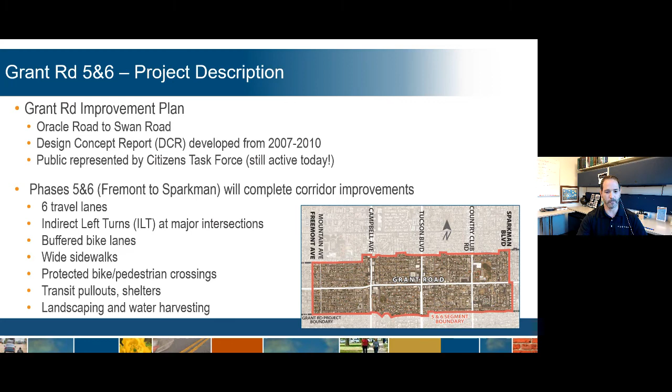So this specific segment will be the last one; phases 1 and 2 are already built. Phases 3 and 4 are at 100% design and should go to construction in the next year or so. Phases 5 and 6 just started design in 2020. We have been working to review what was prepared 12 years ago and are working on 30% plans.

We are almost there, but before we get there, we wanted to get your input and everybody's input. And in fact, as we've been to the in-person open houses over the last couple of weeks, we've already made a couple of tweaks to what we were proposing to make sure we fit the context and what the corridor needs. So feedback is always appreciated.

So 30% plans will come this summer, and from there we'll continue in the design. Later in the design, we'll have things like more detailed landscape plans. We will do a noise study to see where and under what circumstances noise walls are warranted. So stay tuned. We will be back to the public when we get there.

Design completion right now, we expect it will be in 2023, I would say probably towards the second half of that year. Beyond that, we still don't know the exact schedule because funding for construction and acquisition of property hasn't been designated yet. So again, maybe the next time we meet, we will have more information about those stages.

So our current focus as we start this project is to look at what was done in the design concept report, that's DCR, and see if that's still appropriate for the corridor. In the last 10 to 12 years in Tucson, a lot has changed, so we want to evaluate that. For example, since then, the city has developed a bike boulevard master plan, and that's informed a lot of where we need those bicycle crossings of Grant Road.

The city has also passed the complete streets policy, and it's working on complete streets guidelines. So one of the changes we're looking at is to better align the bike and pedestrian crossings with those facilities. We're planning to provide 11 protected crossings where people can push a button to cross, whether that's a traditional intersection or a HAWK signal or one of those types of protected crossings.

The other thing we've looked at is whether we need indirect left turns at Country Club. I have a slide later where we explain the details of that, but we're not sure that those are appropriate at this point. And the other thing we looked at is the land acquisition that was projected for this project was very significant, so we're seeing if all of those are necessary.

Obviously part of that is we have budget constraints, but it's also really important for us to reduce impacts to homes and businesses. Creating a corridor without businesses and without residents is not a vibrant corridor. So you see here, we want to reduce impacts. We want to support economic vitality along Grant Road.

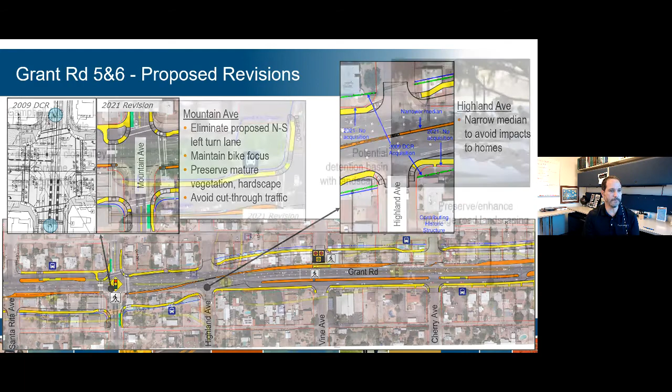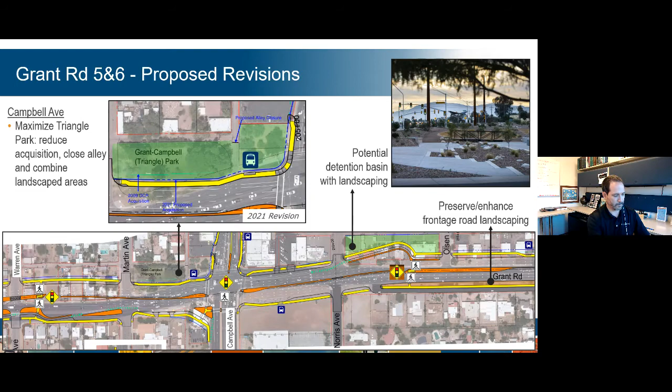Hey, Alejandro, you're cutting out just a bit. Maybe let's try and turn your video off, and we can just go full screen with your presentation. Okay. Do you need me to go back?

Maybe a little bit. Okay. Did the discussion about Triangle Park come out okay? No, let's start from there.

Okay. So on the west side of the intersection, there's a park that people refer to as Triangle Park or Grant-Campbell Park. We are reducing the amount of property from the park that would be needed. The original design would have taken to this green line that I'm pointing to. The new design would go to the blue line. And again, that doesn't look like a big difference, but it's about 8 to 10 feet less of park space that would be lost.

And then we're also looking at closing the alley over here. And by closing the alley, we are able to consolidate Triangle Park with the other green space at the corner of the intersection. And so that creates an overall bigger landscaped area and open space at the intersection.

The other area I wanted to highlight here is Norris Avenue. At Norris, there's significant drainage that crosses Grant Road from south to north. For the project, we are going to have to purchase the properties on the north side of Grant Road here between Norris and Olsen. So what we're proposing is that since we have to do that anyway, we will create a small detention basin here.

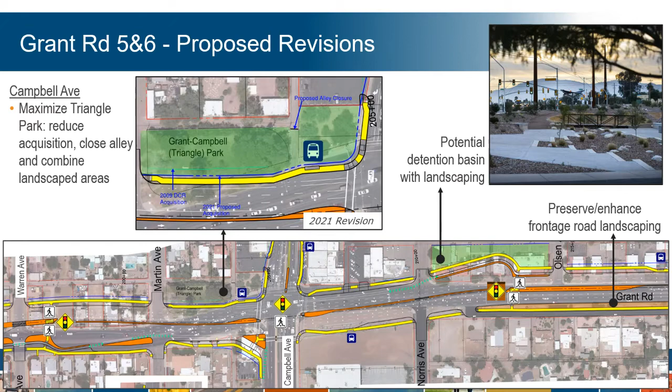We're not changing what the DCR was doing. We're not getting the roadway any closer to the homes. It actually, if anything, is moving a couple of feet away. What we will do is we will add landscaping and new curbing and new sidewalk in that area, the frontage road, better buffering the homes.

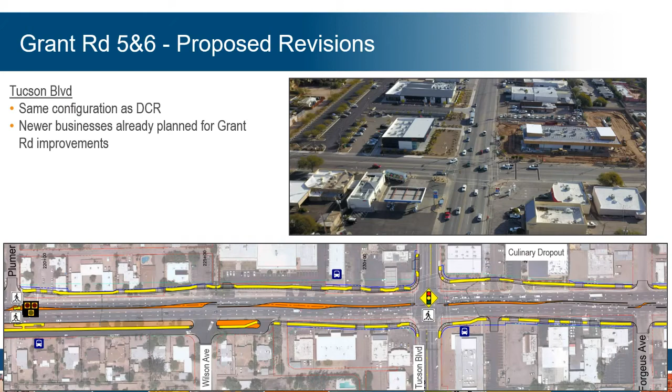Alejandro, you're cutting out a little bit more. Oh boy. I don't know what to do because I'm in the office and that's supposed to have a great connection. There you go. As you got closer, you sounded better. Yeah, I think you need to move closer to the microphone, Alejandro. Okay, I will. Thank you. Thank you. Okay, and please tell me, because I'd rather make sure everybody can hear it. So

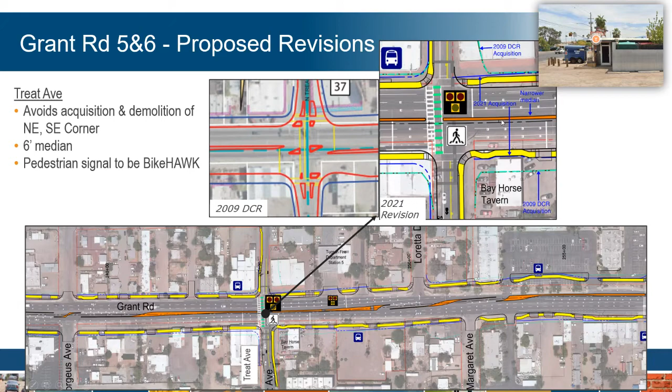You look at Country Club, and it's not really the same type of road. It carries less traffic, and part of it is because it's more of a connector or collector, whatever you want to call it. It only goes down to the Country Club, not intended as traffic. Then we look at what's happening with traffic volume at that particular intersection.

Alejandro? Yes? Just get a little closer, please. I'm as close as I can. I know, I'm sorry, it's cutting out a little bit.

Okay, no problem. So Country Club is not a major regional roadway like the other roads. And secondly, we looked at volumes in the area. And even though the traffic volume on Grant Road overall has been growing, the traffic volumes at the Country Club intersection haven't grown. In 2006, the intersection carried 58,000 cars every day. In 2019, it carried 52,000.

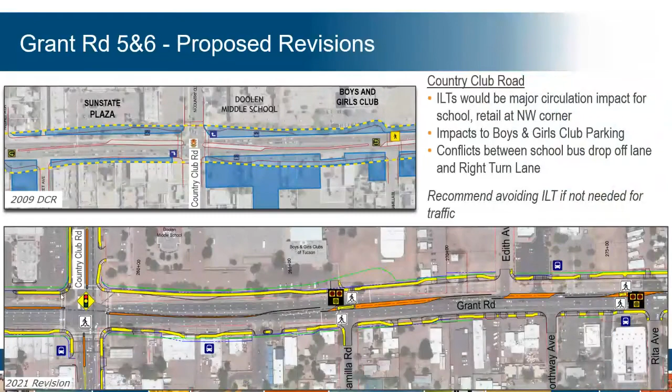without the indirect. So based on that, we are recommending that the intersection remain a traditional intersection, like we're showing at the bottom.

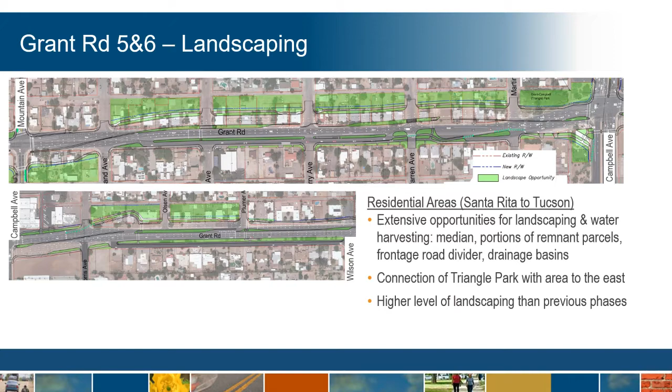On the flip side, as we get to the business areas, I mentioned that the alignment sort of splits both sides, and if we just go full width on all the features, we would end up basically buying out the bulk of the businesses, I think hurting Grant Road significantly. So we try to avoid reducing the pedestrian and bike features, so the sidewalks are still the same with bike lanes, but we did narrow the median. What that means is that we have more limited opportunities for landscaping unless we take the trade-off of acquiring a lot of business.

I would also note that at the open houses we did in person the last couple of weeks, and also when we did phase 2, we did hear from several business owners who told us they don't want very dense landscaping in front of their businesses for visibility purposes. They do like small shrubs. They like hardscape elements and things like that. And lastly, as some of these areas redevelop, the new businesses will have to meet City of Tucson landscaping requirements, so there will be additional landscaping coming later.

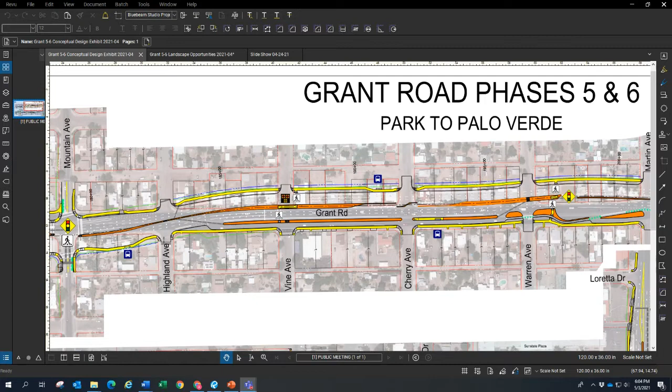Bob or Robin, anything you want to add? Well, I think one of the suggestions that we had on the comment cards was to put some traffic calming devices at the opening of the streets, and so maybe we need to consider that to discourage the cut-through traffic. Right. I will say that the type of median we are showing would prevent lefts out from people cutting through. So when you come out of the local street, you'd have to make a right turn. So again, I don't think we can give it a definitive answer, but we have certainly noted the comment and we'll look into it.

The next question was, will Norris be accessible from Grant Road? The answer is yes. You will be able to make right turns from Grant onto Norris and from Norris onto Grant. Left turns out of Norris will not be feasible. So, like with most indirect lefts, you would go to your next opportunity. So if you're coming from the south, you'd make a right and then make the U-turn at the intersection.

The next question asks to please repeat the discussion on Treat Avenue. I'm not sure exactly which portion, and it's fairly lengthy, so I will cover the main items, and the rest, again, will be posted online. At Treat Avenue, we are going to provide what's called a bike HAWK signal to allow bikes and pedestrians to use the bicycle boulevard. But we reconfigured it from a signal that had a bigger footprint to avoid impacts.

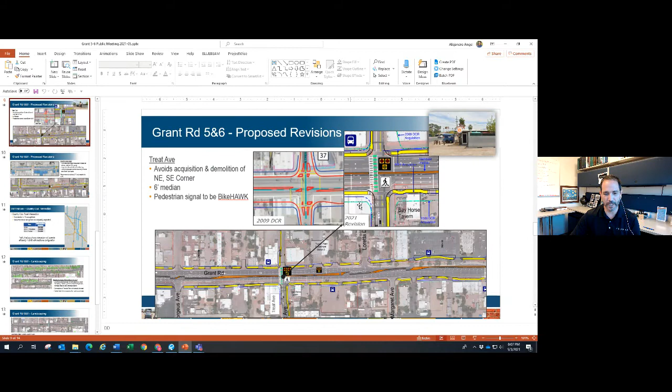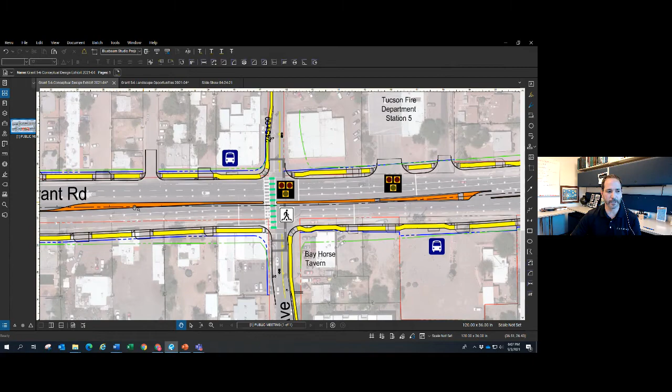Next question I see is, what are the yellow lines? And I'm assuming that's regarding the yellow lines that I'm showing here, which were the same that we had on the presentation. Those are the sidewalks. So, again, the orange is the medians, the yellow lines are the sidewalks. So that shows where the sidewalk would go for the corridor. Hope that helps.

The next question, if the traffic projections were off by 20,000 vehicles for Country Club, how can we be sure your projections for Grant Road won't be that far off? Well, we don't know for sure, but we have done our due diligence to make sure that we are accounting for things appropriately. We've looked not just at how traffic is growing regionally, but what is available in that area around Country Club. I mean, the land uses are pretty much developed.

It's impossible to predict exactly what's going to happen because you have things like autonomous vehicles. You have the shift to online shopping, but at the same time, you have hundreds of Amazon vans running through town every day. So things are different, but we did a sensitivity analysis. So we ran what we think would be the growth rate, and then we ran a higher growth scenario to see if it would still operate appropriately, and it would with the traditional intersection. So we are confident that it would operate well.

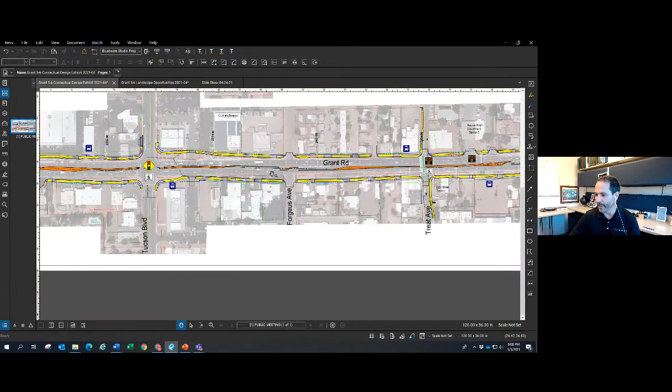The next question is about, has consideration been given to using the southwest corner of Treat and Grant as a detention basin? We have had a couple of discussions about that. What I can say about that corner, which is this building right here, I think today is a dispensary. We know that we need to acquire a portion of the building.

Even though we're reducing the footprint of Grant Road, the blue line is what we need for the project, and I just highlighted it yellow. That still cuts through the building, so we will offer to purchase the building from the owner. Any property, the owner has an option to sell to us, we would have to pay them for the building, and they have an option to retain a portion of their property that we don't need if they want to. Normally that's not economically feasible, but it's their choice.

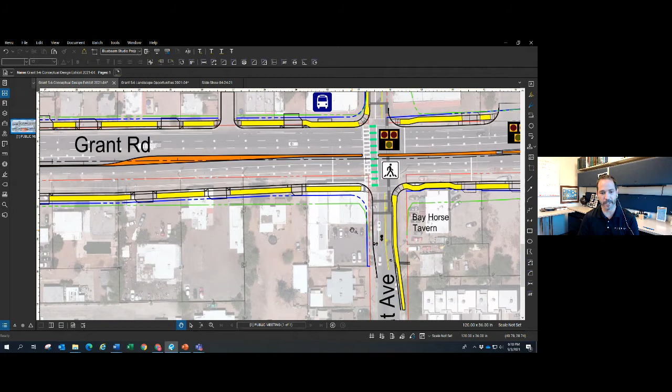If they decide not to keep the portion of the property that we don't need, then we can either look at it as a detention basin or as a parking area or park or remnant to resale, any of those other uses. Treat does carry a lot of drainage, and that's something we would consider as well. I know that corner is a hot topic for city council and a lot of people, given the amount of traffic that's brought to the area. Is there anything else that anybody wants to add, Bob or Robin?

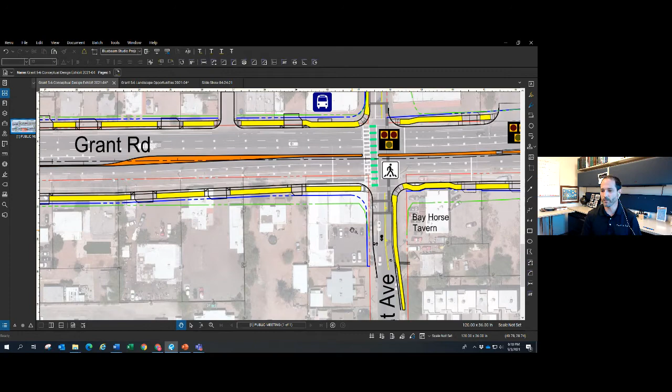No, I think it's too early to really give any information for that particular parcel. Yeah, I guess the best we can say is there's no way we can completely avoid that property with the project. So we are planning on an acquisition. I guess the only thing I would add is as we move forward in design, we'll take what opportunities we can where we have additional property. Mm-hmm. Yep.

Okay. Thank you, Robin. The next question is, more space should be set aside in the business area section of Grant phases 5 and 6 to make room for green space and water harvesting landscaping. Our neighborhood is adjacent to this area, and the disparity between the design section is not equitable for the neighborhoods along this area. So that's a great comment. It's not a question, it's a comment. I will say that we are trying to do everything to make it as nice as possible in that area. We do have a constraint.

Which is more tolerable? Is it to reduce the landscaping and compensate in other ways, or is it acquiring businesses and properties adjacent to the whole corridor? So at this point, we're proposing that we look at other ways to mitigate the loss of some of the landscaping. And again, I wouldn't say that there is no landscaping in this section, but there would be less. These are some of the things we can do.

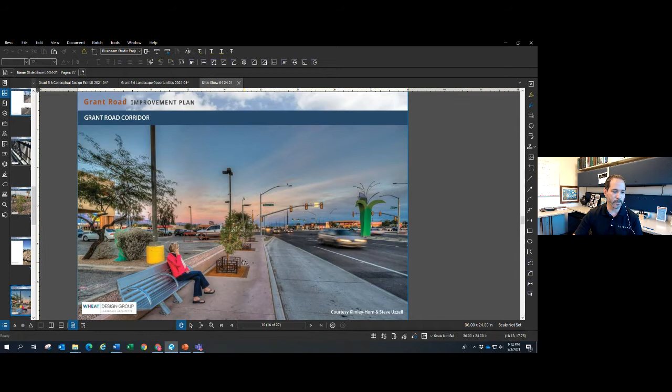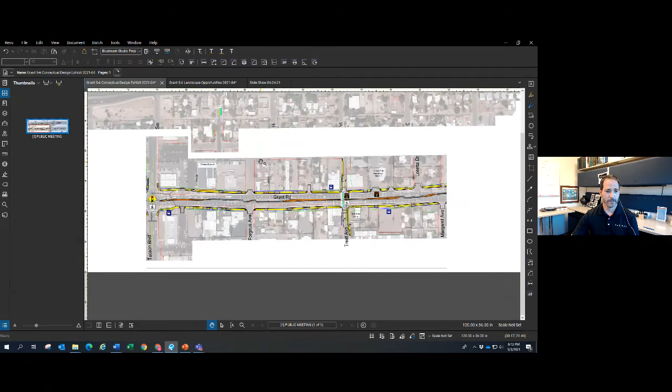Next question is a good one. Again, what is planned for the old Bookman's and its parking lot? So that is referring to the southeast corner of Grant and Campbell. So let me go to that area. I know zooming in and out sometimes gets me dizzy, but here's Campbell and Grant. So the question is in regards to this property right here, where Bookman's used to be. And we don't know for sure. It's privately owned. At one point it was owned by Banner. I believe somebody else owns it right now.

I don't know who the owner is, but I did hear recently that they were considering development plans, and someone asked me what would be a good point for access off of Grant Road. So we did share our plans, so they would know that a driveway that's not in conflict with the bus pullout would be best. So not sure what the use would be yet, but I know they are looking into redeveloping it. Bob or Robin, do you have any info on what they proposed? I don't think they filed a development plan yet, so I don't know that we know.

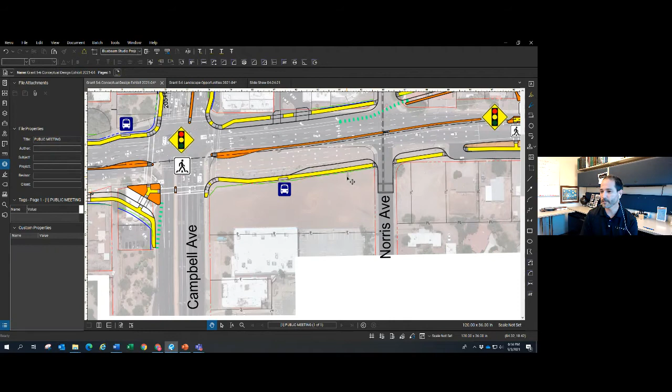We've been talking to a California design firm, and they have like a drive-up bank, a coffee shop, and some other. It was like 3 buildings that they were proposing, but I don't think it was financially viable for them at the present time. Keep in mind that on your picture there, that's the remnant that would be left over after Grant Road moves to the south. Mm-hmm. True. Yeah, there's a portion of the property that's already been sort of anticipated to be part of Grant Road right here, that area. So thank you, Bob.

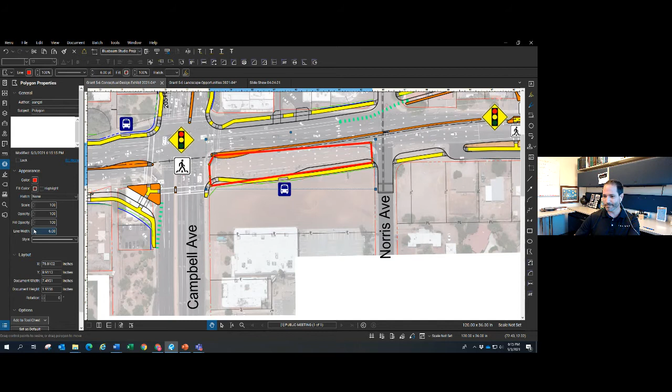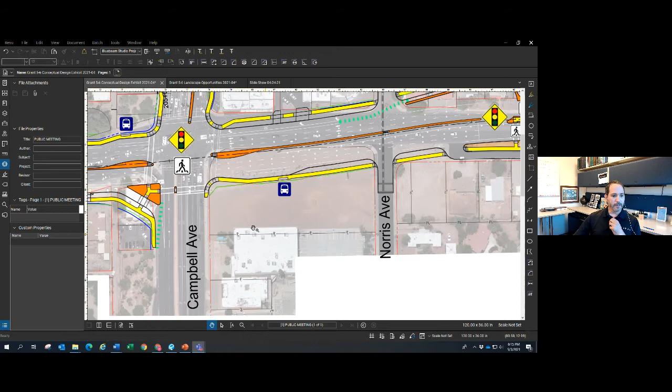There is a question about right turn lanes. What about right turn lanes? So we do look at right turn lanes to provide those in places that have high volumes, high demand. And we are doing that here. So for instance, at Campbell Avenue, we are providing right turn lanes in all directions.

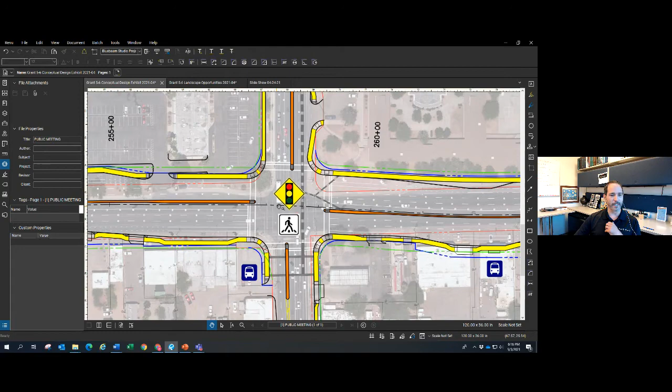I don't remember them all by heart, but it looks like we have right turn lanes planned at Mountain from Grant, but not from Mountain. At Country Club, I know we have right turn lanes in all directions as well. I know this is hard to see, but there are right turn lanes in all directions there at Country Club. And if I go to Tucson Boulevard, there's right turn lanes northbound, southbound, and westbound. So most of the major movements have right turn lanes.

Take another sip of water.

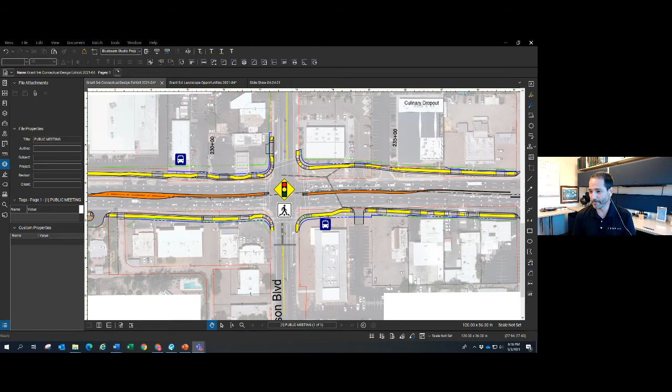Next question, and Bob, I might pass part of this to you. What public art will be installed with phases 3, 4, 5, and 6? So do you want to take this one? Sure. So we have selected a panel for the public art for phase 3 and 4. And we have not selected a panel for the public art for 5 and 6. 5 and 6 will be a little bit down the road once we establish when construction will be coming along. And we'll have to find a place for that public art on 5 and 6.

Grant Road 3 and 4, the panel is in the middle of trying to select the art and the location. And I think 3 and 4 we're kind of zeroing in on Dodge and Grant, and we're gonna have a detention pond there. And we have 3 ideas that were presented by the artist Joe O'Connell that the panel selected. One's kind of modern, the other one's historical, and one is of an animal. Pretty much all of them are spotlighting the environmentally friendly perspective of the road. So that's, in a nutshell, where we're at.

Bob, so to recap, Grant 3 and 4, the artist has been selected. It's Joe O'Connell, and the art's going to go near Dodge, right? Yeah, that's where the panel is selected, but I think they haven't finalized though. Okay. And again, for 5 and 6 it's too early. The artist usually gets selected, and the panel that selects the artist is a group of citizens, representatives, city representatives, and others.

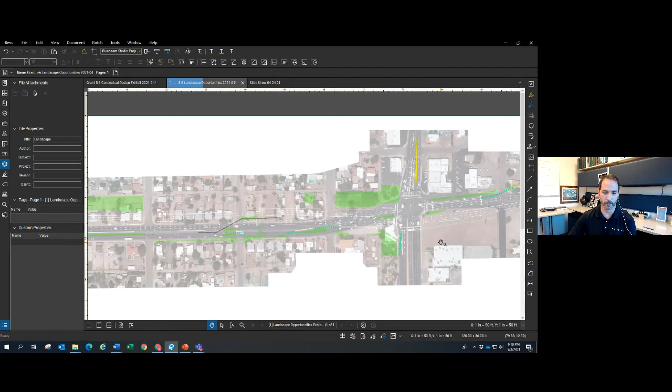I would say on Grant 5 and 6, we do have a few opportunities. Whether it's Grant and Campbell Park, whether it's the new basin at Norris or any of the other areas along Grant, there's several high visibility areas that I think they might like. They generally don't like to be close to utilities or other things that obstruct their art or the visibility.

Will the public, I'm sorry, this is Robin. Will the public get some input into the artist conceptions for Grant 3-4, Bob? The way the statute's laid out is the panel selects the art. We have a very large panel, and all of the members on the panel actually live in the neighborhood. So we have a number of people that are on the HOAs. They're sharing the information with their homeowners association. So I think it's more of a local decision is what it's meant to be.

Right, I understand that. If anybody here would like to see any of those artist conceptions, is there a way for them to do so? I know you're going to be presenting those for the task force, correct? I don't think we've made that decision.

So they're supposed to make a decision before the end of the month, what art they want to see go onto the project. And once that's selected, then we'll share it. Right. So people will have an opportunity to look at what's been selected? Yes. And some input. I think it's always important to be able to see it before it goes in,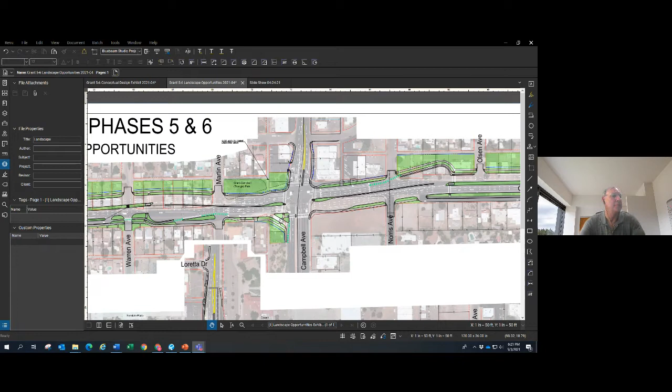Sure. And I would say people interested in the art, maybe reach out to Bob, and Bob can reach out to the Arts Council and see if some of those things that were at the in-person public open house could also be shared with anybody who's interested. Yep. You bet.

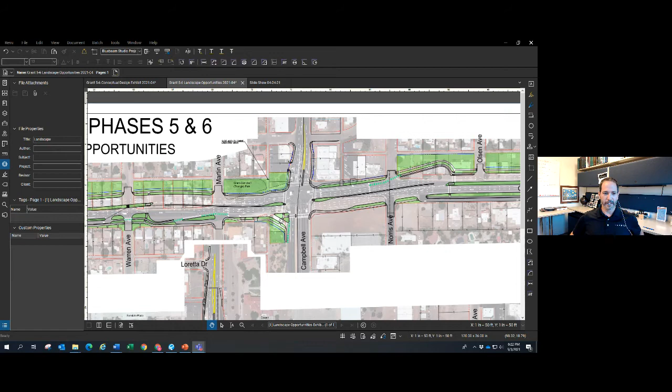Next question. And Robin, I might ask for your help on this. What is the city's plan to prevent these landscape medians from looking like the basins along Glen that have buffalo grass and minimal plantings? So I can speak as far as the plantings because, as we've done on phases 1 and 2, these will have fairly heavy plantings. They do start small, but they grow over time. So this is some of the landscaping on the other phases. So plantings will be incorporated. As far as the maintenance, Robin, do you want to chime in?

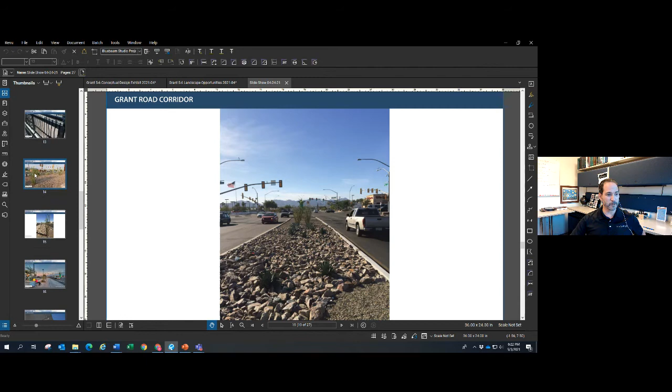Yeah, so for the first year, maybe it's 2, Bob, you remind me, the contractor does take care of the landscaping because like Alejandro said, it's small, right? So the first couple of years, or maybe only a year in some cases, we call a landscape establishment. So the contractor takes care of it. So for that period of time, we're pretty well assured that it won't look weedy. Of course, right after a monsoon storm, we all know they sprout up pretty quick. So there might be a few days here and there, maybe a week.

The other thing is for long term. So we've had cuts ever since the 2008, 2009 timeframe, where there wasn't very much money, but just recently, especially in this latest budget plan, we're adding more funding to the landscape maintenance. So over time, we're planning to have more maintenance done in the median areas, and if it all goes as per plan, we will not have as many of those problems throughout the city, and that will include this. Thank you, Robin.

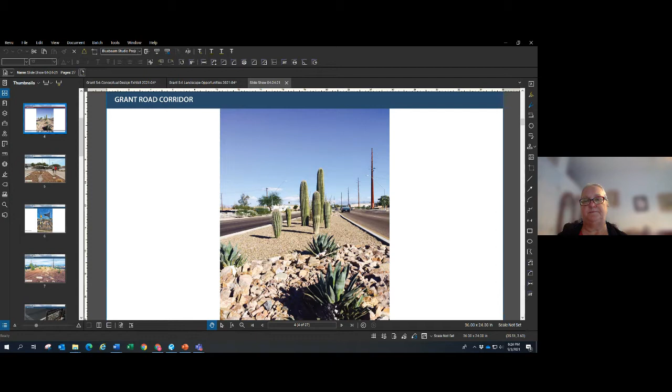The next question is, and by the way, we're taking the questions as they came in, so hopefully we're not too far behind. It looks like we're 10 minutes from when they're asked.

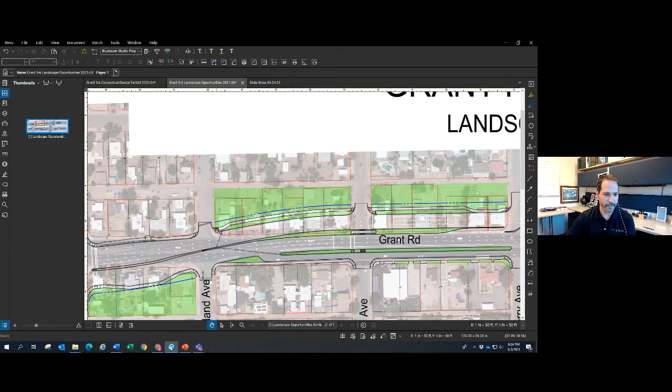Somebody asked, I live 1 block north of Grant on Highland. What will be my view looking south? I'm pulling up that area. So there's Highland. So here's Grant at Highland. I assume that the person who asked the question lives somewhere up here, a block north. East of Highland, the first row of houses is being acquired for Grant Road.

Because we're acquiring the entire parcels, we are moving the part that will be included with Grant Road further back. This blue line, which is the project limits, used to be right behind the sidewalk, which is right here. We moved it back, so we will have an opportunity to do plantings both between the road and the sidewalk and between the sidewalk and the open area.

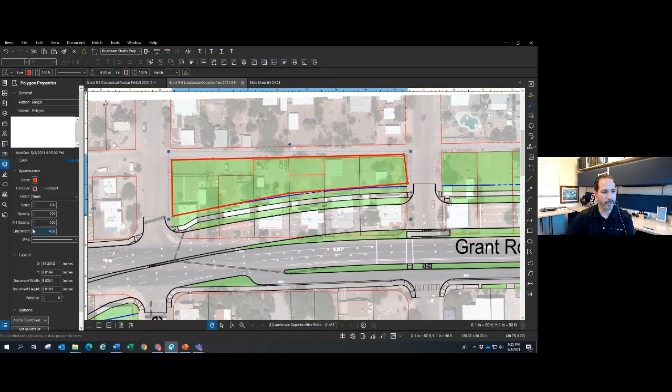We are also going to do what we did on phase 2, which is if there are mature trees in good condition in the existing properties, we will preserve those so that we don't just leave a barren area. So the area behind the blue line, which is right here, I'm highlighting it, we'll stabilize it. We will preserve the good trees. And I think at one point, the approach was to redevelop those parcels. I don't think that's what is being proposed right now.

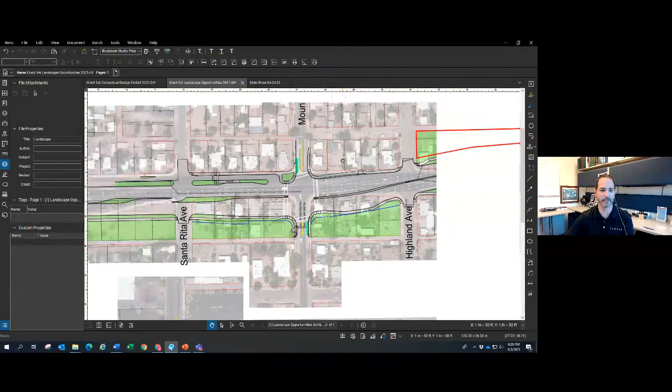It would be an opportunity for the neighborhoods to work together and make it a great space. I know Jefferson Park, for instance, out here between Park and Santa Rita, just completed a linear park with some of their own work to get grants, 407 monies, and other resources. But you can see here, after Grant Road Phase 2 was built, there were a decent number of trees that remained in location.

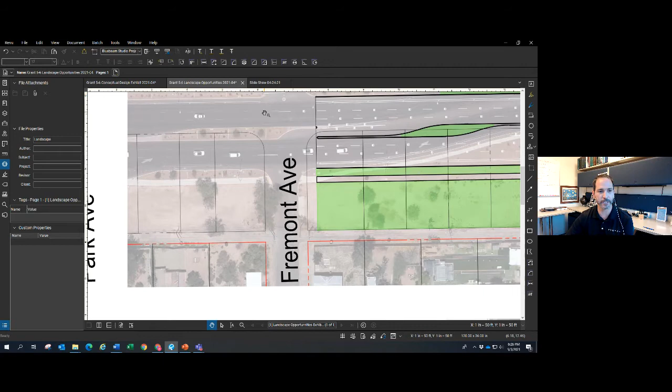The next question is about bike lanes. What is the proposed width of the bike lanes? Will there be any sort of visual buffer between the vehicular and bike lanes? What we are proposing right now is 6-foot bike lanes with a 3-foot buffer between the bike lanes and traffic lanes. So it would be similar to what you see here. A buffered bike lane, 3-foot buffer, 6-foot bike lanes.

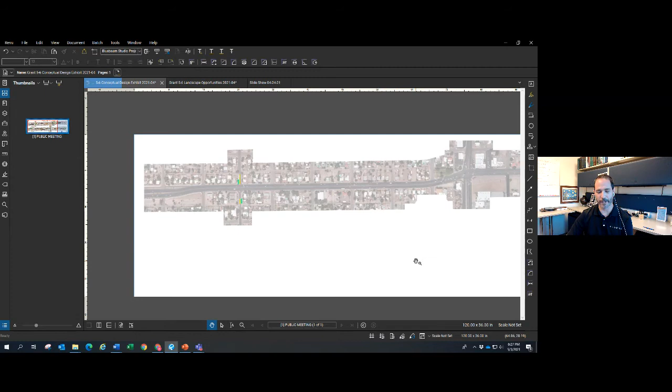I know the question comes up often about why don't we install a raised separation, whether it's in the form of curbing or flexible posts. The challenge we have here in Grant Road, frankly, is that there are so many driveways that it's very difficult, or it's inefficient to provide that. You can look at here how many driveways. There's a driveway every 50, 75 feet. So it makes it challenging to provide those. And if it were flexible posts, it would be a maintenance nightmare. So we are trying to provide the best buffer we can.

And then the city's also worked on providing parallel facilities for bikes. Seneca and Beverly Boulevard to the south. And those are actually funded through 407. So that's a project that will happen. Then to the north is the Copper Flower Bike Boulevard. So those will be a lot lower stress routes as well.

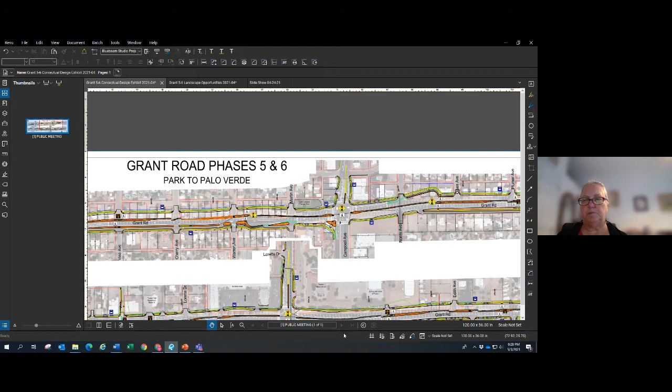Anything to add, Robin or Bob, on bikes? No, I think you covered it, Alejandro. The point you made about all the driveways, even if it wasn't a maintenance nightmare, it's really just a question of you'd have a post and then a driveway, a post and then a driveway, and that doesn't really provide the buffer in the way that we want to provide a vertical buffer. Okay.

The next question is about what can be done to decrease cutting through on Norris to Spring? It's already a problem, and the indirect left ending there will only make it worse. So here's Norris, and Spring is the street to the north right here. Two things. By having a median, it will make it more difficult to cut through, I think. People heading east are not going to be able to turn onto Norris to Spring. And the other thing is, as we try to reduce congestion here, that will decrease the motivation to cut through. If you want to send an additional question, I'd be happy to look specifically at that area.

Next item is, realistically speaking, when is construction likely to start on these phases? And will it start from the east or the west? So first, where will it start? We don't know that yet. It'd be too early to tell. It will depend on where utilities relocate first, what properties have been acquired first. So the area where they can work will determine where the start of the project is.

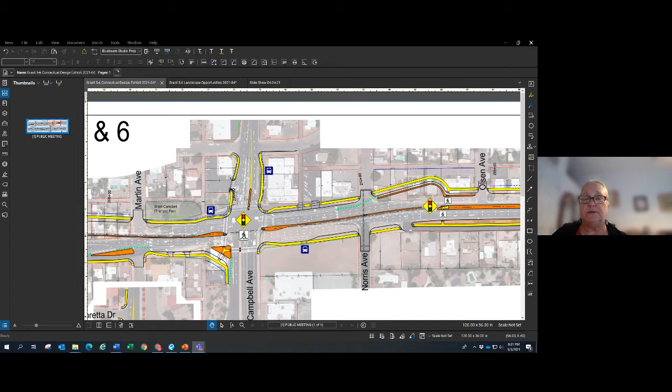I'd also like to add on whether we start from east or west. You mentioned the utility companies, which certainly will do their relocations mostly before the project starts, but we won't know where the contractor will start until after we have a contractor on board, and that will be when this project is fully designed, everything's acquired, and the utilities are out of the way. It'll be some time before we know that answer. Okay, thank you.

Next question. Is there funding to build phases 5 and 6? When would construction start? So I think we answered the second part of that question already. Is there funding to build phases 5 and 6? I think no funding has been set aside yet on the transportation improvement plan, which is the 5-year plan. That's why we're saying that. I don't think it'll be less than 5 years. So from that perspective, it hasn't been programmed, but I think both the city and the RTA are committed to finding the funding to build the project.

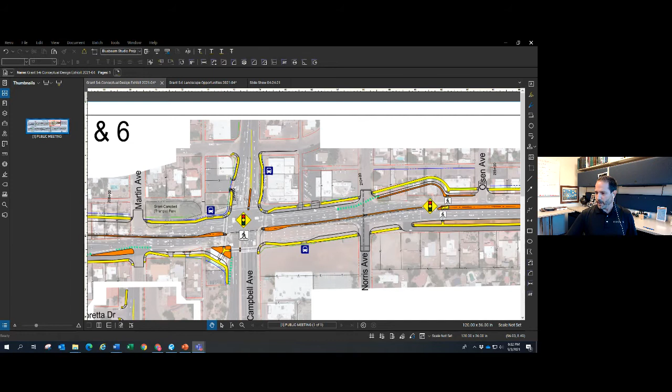Next question is about drainage. There are areas along Grant Road where the water runoff flows south for businesses. So how will you accommodate this without backing up water? Do you know where these areas exist? Have you talked to property owners? So yes, we do a few things to evaluate things. We pull up drainage complaints at the city. City keeps a record of those, so that helps us a little bit. We have talked to property owners, and for instance, I know the Kingfisher owners have talked to us about how much drainage we have heading towards them, but we've also done a drainage analysis.

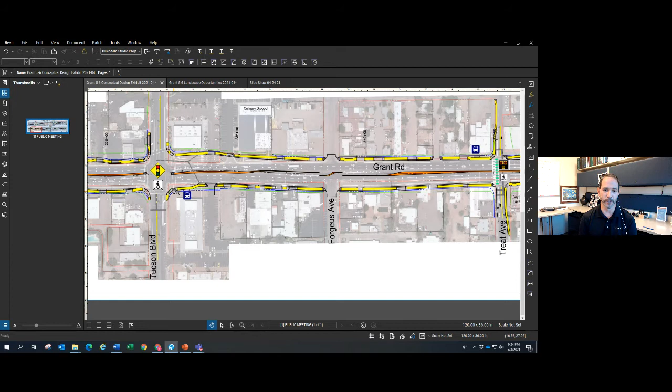So exactly where. Alejandro, can you adjust your microphone again, please? Yes, Bob. Okay. Sorry. Let me back up. And I'll get closer to the camera too. Yes, I think you need to be closer to the laptop. It seems to be better. Thank you. Let me back up.

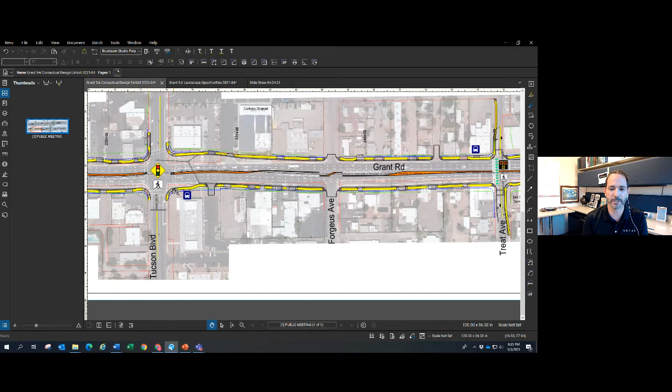We research drainage complaints with the city to see where the problems are near Grant Road. That's one item. Two, we've talked to businesses, and I mentioned an example where the people from Kingfisher mentioned to us how much water goes from Forgeus to Tucson and how it flows. But third, we have done a detailed drainage analysis, and right now it's the initial draft. But that does show the areas of significant ponding, and we know, for instance, those are at Treat, Norris, Country Club, Camilla, Tucson Boulevard, all those areas where there's significant flows. We are looking at finding ways to get as much of that water as we can into the existing storm drain system or into the detention basins.

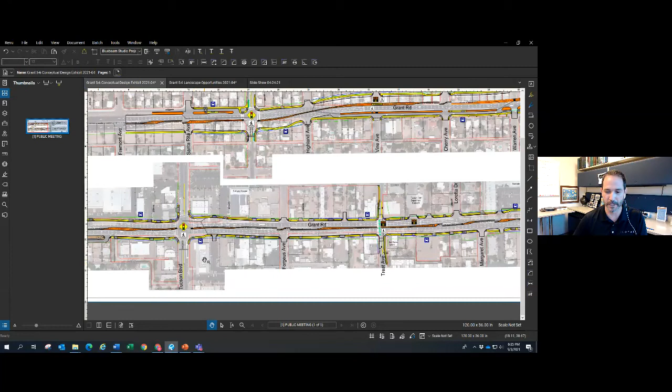I don't want to overpromise because we can't fix the regional drainage issues north of Grant. There's some areas that have a ton of water that we're not going to be able to dry out. It would be another $50 million on itself. But we are committed to, one, making sure we don't make things worse for anybody, and two, trying to take the opportunities we can to improve drainage. So once we have that drainage report published, I'm sure we'll be able to share it. And so that's where we are.

We are also trying to make sure that we make Grant Road an all-weather access road, which means that even if you have a 100-year storm, a huge rainfall, you would have water on Grant Road, but it would still be drivable for emergency services. So I hope that helps. And again, in all of these, if you have a follow-up question, you can either put them in the chat or contact us, and we'll be happy to work with you on them.

Next item is please acquire some businesses, dilapidated structures, so the two zones will both have green space. Otherwise, it's the lower income neighborhoods only getting hotter. We need park and green space too. So I don't want to reiterate what I already said. We are looking for as many opportunities for green space as we can. If there is a business that we need to acquire for the roadway, we will try to provide plantings where we can.

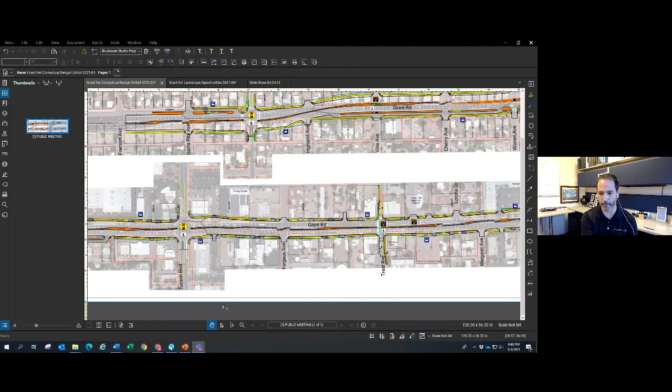Then they use that model and create a new one for the future that has the higher traffic volumes on Grant Road, the new profile and the new alignment for the road. And then they use that new model to predict what the noise levels will be on Grant Road. And that's what determines where the noise walls go. Again, on phase two, a few properties warranted noise walls, others did not.

And we actually did a noise study to predict noise. And then after the project was done, the city did another noise study to verify that the projections had been correct. And that study showed that, yes, the projections were all within 1 decibel of the actual noise levels. So the noise study was correct.

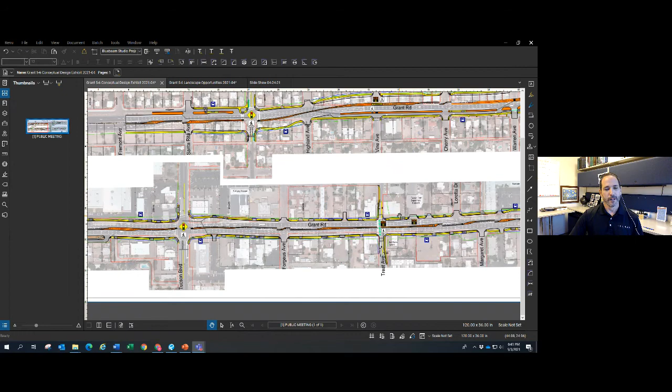Next question. Has it been considered to not allow left turns from Mountain onto Grant during any time of day? That's a question we haven't gotten to yet. I think where we are right now is to continue the status quo that prohibits left turns during the peak hours. So that's certainly up for discussion, but to be determined. Unless Robin or Bob, you've heard or said anything else. No, I think we need more input for a decision on that. Okay.

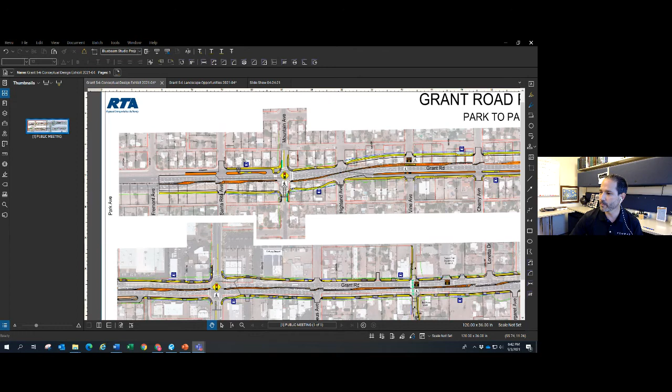Next item, will all the bus stops be covered? Yes, all the bus stops will be covered. And in fact, they should look similar to the bus stops that you see here. Well, that's not a good example. Yes, they will be covered. Let me see. I know I have some from phase 2 that are covered.

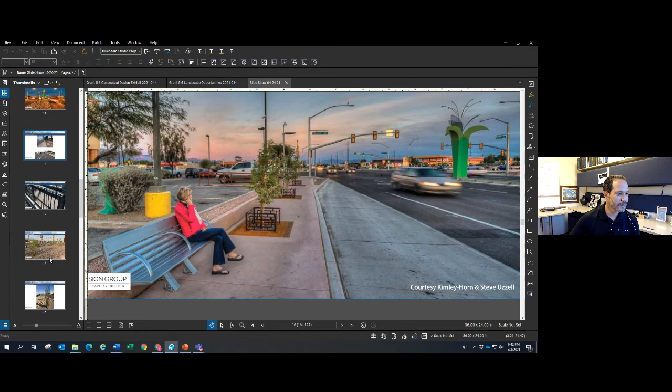Here, they'd be similar to this. Yes, they will be covered.

Please take another look at the Norris to Spring to Campbell issue. I live right at the corner of Spring and Norris. Despite a speed bump, cars bypass the wait at the light and cut through. So I assume that's the westbound. So yes, I guess the short answer is yes, we will take a look at it.

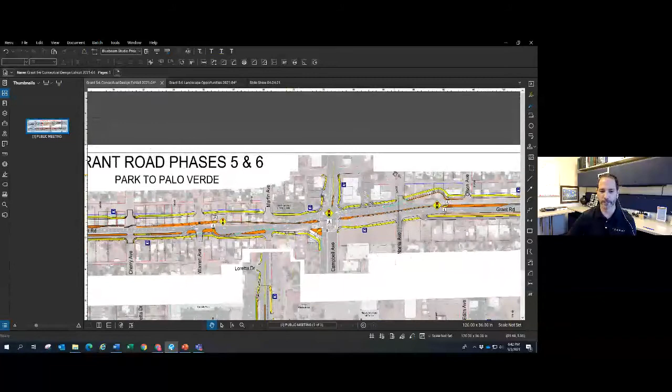I just want to clarify that the concern is traffic heading west, going this way, and so if you're still in the meeting, if you can just send us something that says, yes, that is the issue. I would love to make sure I understand it. But I think it's west to north to right on Campbell.

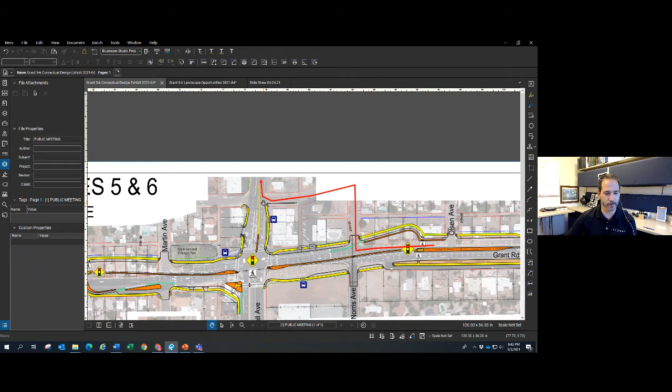One thing that will be very different than what's out there today is now there will be a significantly longer right turn lane all the way from Norris to Grant. So traffic trying to turn right will not have to contend with through traffic. It'll be on its own lane, even from the indirect left here, to make that right turn. And again, I think that will make it significantly faster and less desirable. But if I'm misunderstanding, I don't want to give you the wrong information. So please let us know.

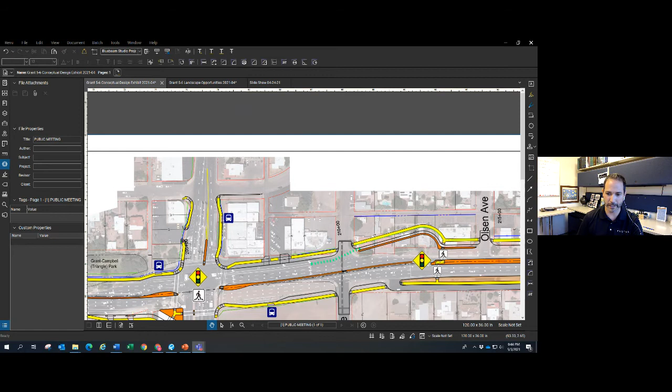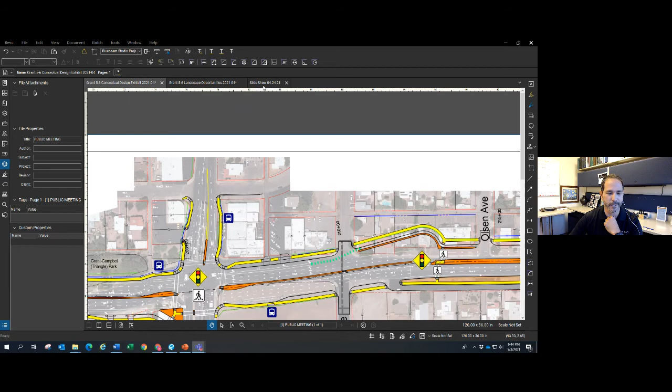From the text, can you describe the new bike lanes? So yes, if you are familiar with Grant Road Phase 2, they will be similar to those where, from the curb, you will have a 6-foot bike lane, and then you'll have a double stripe buffer between the bike lane and the travel lane. In Phase 2, that was a 2-foot buffer. On phases 5 and 6, it would be a 3-foot buffer with crosshatch. And again, I would encourage you to watch the video at a later time and see the renderings that we're showing here, because it'd be similar to what I'm showing right now.

Will there be an elevation change on the new road? If yes, how much? Again, that's not finalized yet, but we are trying to keep any elevation changes to a minimum. If there are any, I expect them to be hopefully a foot or less, because if we change the elevation of the road too much, we will end up with drainage problems on Grant Road. So we're trying to keep it as close to the existing one as possible. Some of the drainage crossings could possibly be siphons from one side to the other to keep us from raising the road. And if we don't raise it, it also helps avoid increased noise.

And Robin and Bob, feel free to chime in. I don't want to monopolize the conversation. I would, but you're doing great, Alejandro.

Alejandro, could you explain what a siphon is? I suspect a lot of people don't know what that is. I wish it was easy to explain, Bob. I know. That's why I put it on. Yeah, a siphon is basically a structure where the road wouldn't go up. The water would fall into a drainage structure under the road, and then if there's enough water, the water would sort of bubble up on the other side of the structure downstream of Grant Road and come out. That's during a big storm.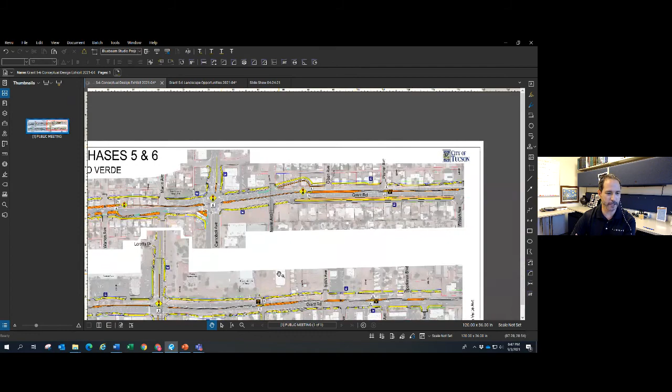There is a question about Chevron, and I assume this is about the Chevron station at the northwest corner of Grant and Tucson. So that's this property right here, and unfortunately that's one of the properties I don't have a clear answer for yet. It looks like there's a possibility to avoid the canopy and the underground tanks where they store the gas. There are some impacts to a couple of the parking spaces, and we need to make sure the driveways can work. So if you are the owner, we would love to talk to you. If you're not, we're still looking into it and seeing what can be done.

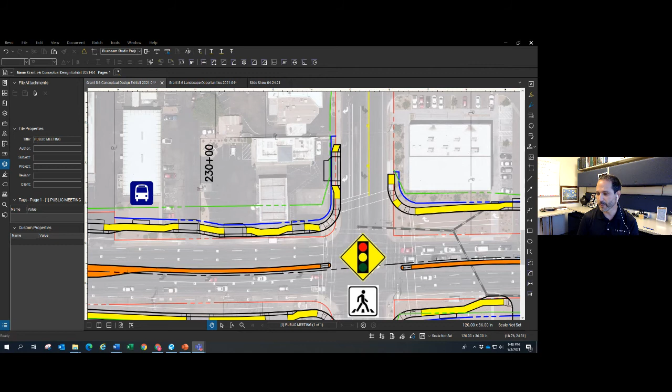Next question. What lighting will be added, and are there impacts on dark skies and bird migration factored into the design? So we do have street lighting included on Grant Road. It is LED lighting, and it's 3,000 Kelvin. And I say that only in case you're familiar with it, but that's lighting that's less white light. It blends more with the environment. It's better for observatories and dark skies. It creates less light pollution.

The other nice thing about LED lights is that they point the light downwards. There's less light spill upwards. So we're using LEDs. And one additional feature that we're committed to doing for this project is in phase 2, we had some concerns about lights from those street lights going back into the residential properties. So wherever we're in a residential area, there will be light shields to keep any light spill from going back into the residential properties.

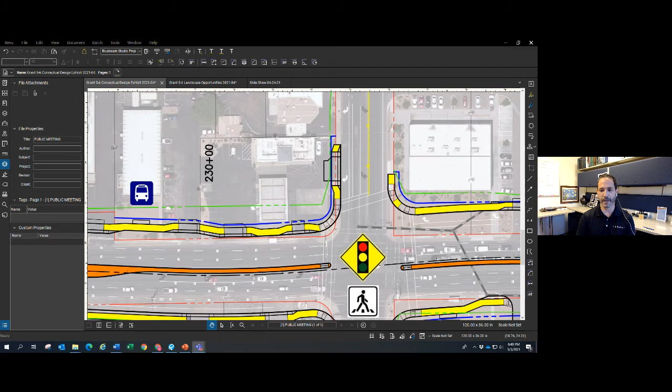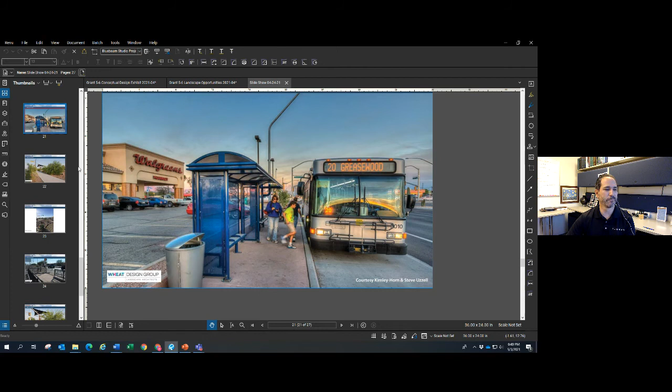Last thing I think for lighting is in the bus stop areas and in other areas of heavy pedestrian use, there will also be pedestrian scale lighting, which are lower lights. I know it's kind of clumsy for me to go back and forth on these things, but I hope that's not a good example. Neither is that one. But again, if you do look at phase 2, the pedestrian lights are only like 15 foot tall instead of 30 feet and are focused on the sidewalk area.

So I think I have dark skies. I can't address bird life and bird migration with street lights. I apologize. I don't know a lot about that.